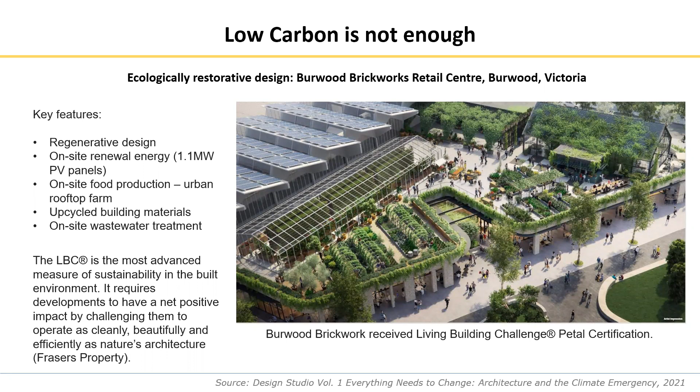We are doing it. The idea is how effectively can we learn from some of these, how we can set a better benchmark, pathways and targets so that we can drive more effectively towards all buildings trying to do the same thing. I mentioned carbon is the focus of my talk. So the case for carbon, net zero carbon, is very clear.

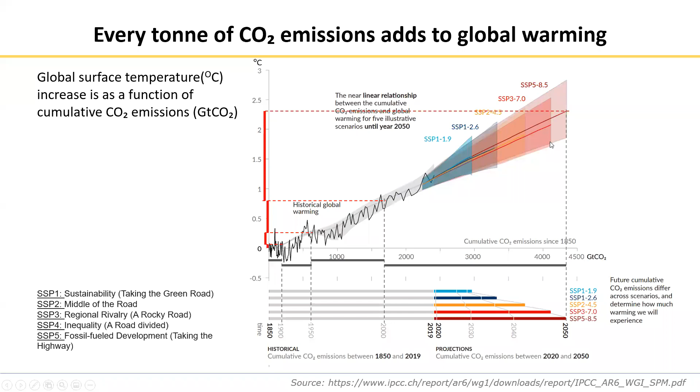And not only are the averages clearly moving in that direction, but there's a difference between the worst case and best case scenarios according to these projections. In the worst case scenario, by 2050, a date being flagged a lot, we're going to exceed 2.5 degrees C quite clearly. Under the best case scenario, we would be under 2 degrees C, but that in itself is not the best result because there are more optimistic scenarios we can aim for.

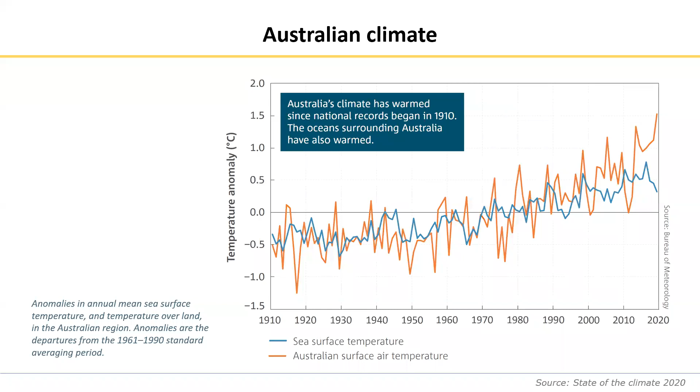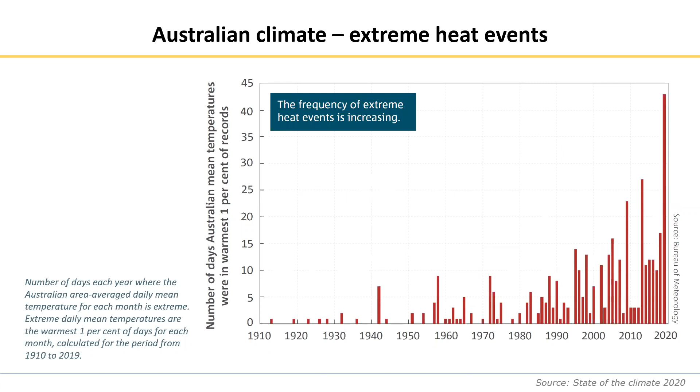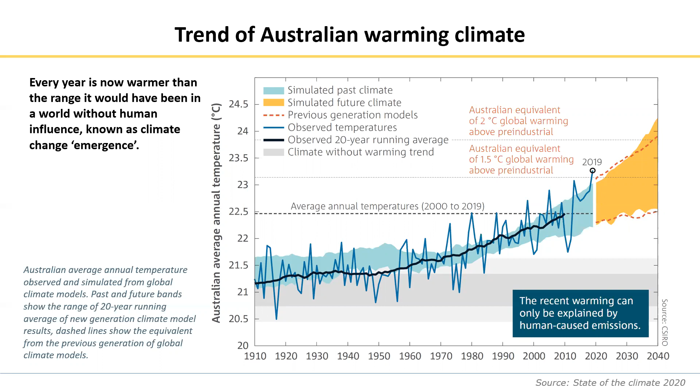We need to be very mindful that this is beyond doubt in terms of science. It's a matter of how, under the best scenario, we can navigate these issues. Buildings and the built environment are a clear opportunity, and hence my talk about buildings today.

At urban scale in Australia, close to 80% of people dwell in cities, urban centers. They are clearly hotspots, and we observe differences, with temperatures now reaching in excess of 40 degrees C in many places, particularly in Sydney here where we live. Western Sydney, Eastern Sydney, differences are talked about a lot.

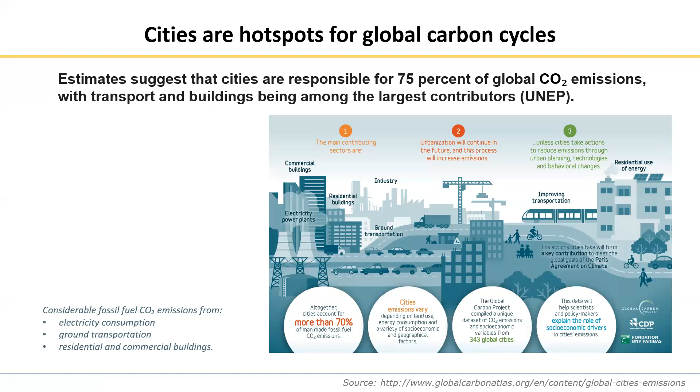Estimates suggest that cities are responsible for about 75% of emissions. And within these numbers sit transport and buildings, which are the larger contributors inside of that. So cities as a whole, but buildings in particular, are our concern as architects and engineers. We are looking at how best we can address some of these numbers that we observe.

The Global Alliance for Buildings and Construction, which is part of UNEP, the United Nations Environment Program, in their latest report show that the building industry consumes about 36% of total energy, and 37% of total emissions are attributable to them. About 10% of the total is the construction side, the manufacturing, the embodied carbon, in other words, and the rest is about operational carbon at the moment.

These numbers are global averages, and per country these numbers are slightly different each time, so for country details you can refer to your own numbers. But the point being that it's in that scale, 37%, some countries go up to 40% or so of total emissions being related to buildings. And it is, either way, very significant.

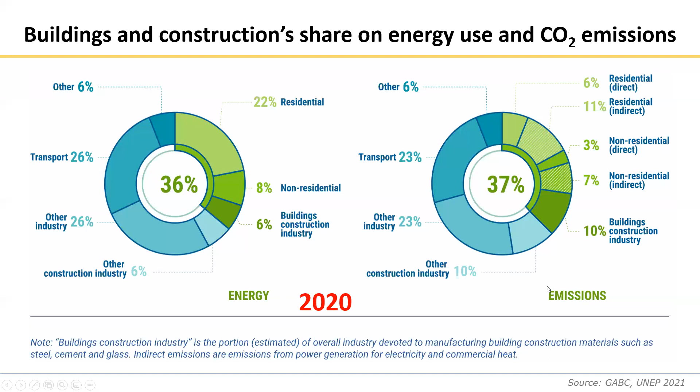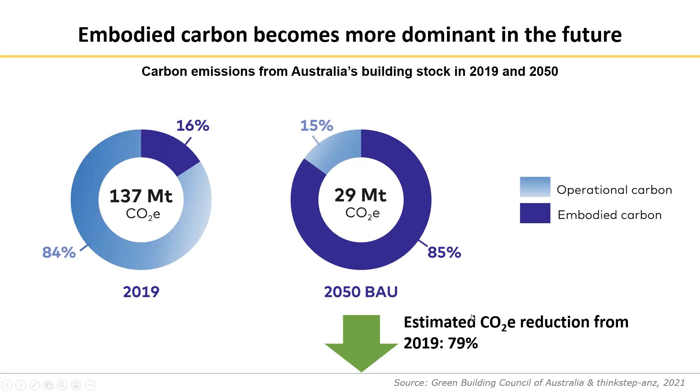So we need to look at what we call whole-of-building issues, and I'll come to that in a minute as well. There are many good stories to point towards.

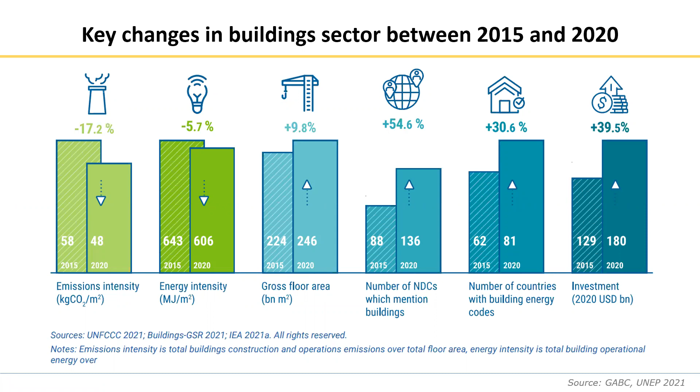Globally, emission intensity has changed, going down from 2015 to 2020. Energy intensity has improved, but at the same time gross floor area is increasing, and the population is increasing too. But on the positive side, the number of countries with building energy codes is increasing, and investment in this whole area of carbon and renewable energy is increasing a lot. So you can see there is increasing commitment and improvement, in which case we are headed in the right direction, but we need to be doing a lot more.

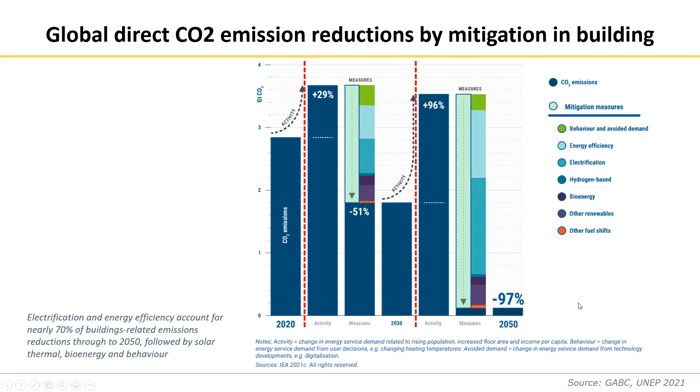And from that 2030, if you look at the increases in terms of business as usual around then, it would be significantly higher. But the measures that will evolve for the 2050 range, in terms of both what's happening at the grid level and at the building site level, we believe this is a good indication of a 97% improvement by 2050, which is very close to the numbers being talked about in terms of emissions reductions.

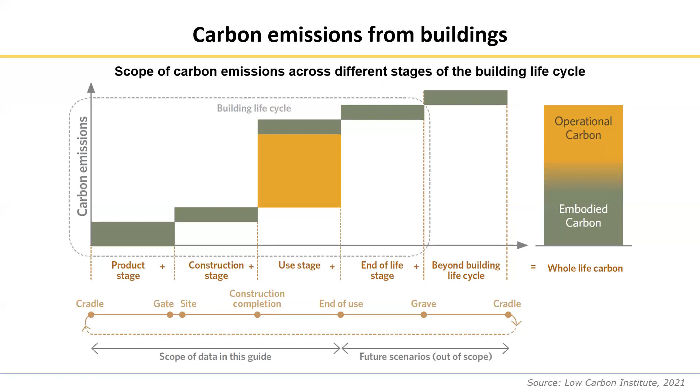So we should be looking at a whole of building and whole of life way of thinking about these. Whole of building includes embodied carbon and operational carbon, both, but across the stages from product stage, construction stage, use, end of life, and beyond life. When we start considering this entire timeline of building life, we can start making significant impacts in terms of reductions in carbon and to deliver on the 2030, 2040, and 2050 goals that we are beginning to have.

Focus now, as I mentioned through those numbers, is getting back on embodied carbon because it was the less understood, perhaps, but less considered element of low carbon design.

It was urgent for them because around that time, their population stopped growing in a net growth sense, and as a result they were having buildings that were unoccupied. We were looking at building redeployment as a serious strategy when the population is not increasing, and they have gone a long way in countries like Japan where they have considered these.

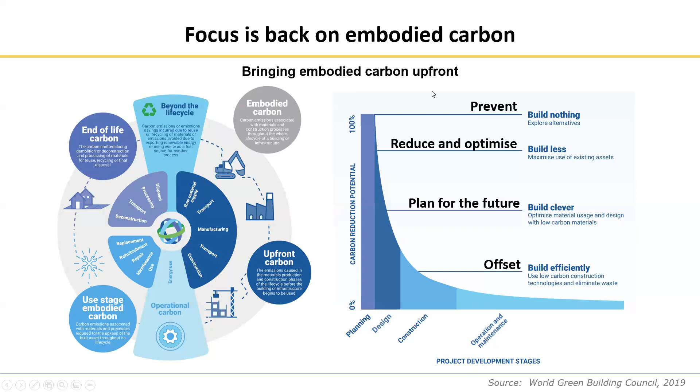Embodied carbon upfront is an issue, but embodied carbon during the life of the building also needs to be taken account of, so that whole of life embodied carbon, not just the front end which is the big number, is still accounted for in the carbon accounting equations.

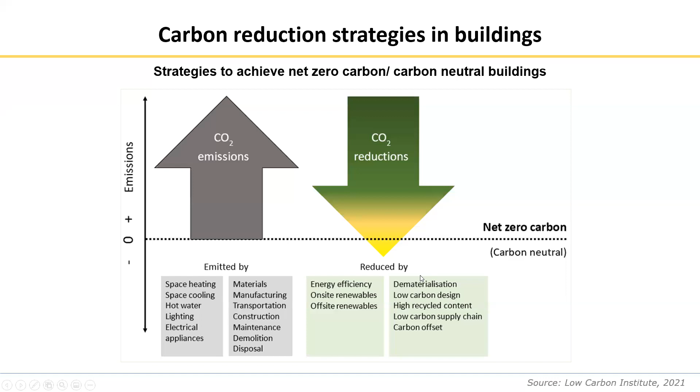And then reduction opportunity to go even beyond the zero mark through efficiency and good design, on-site generation, off-site generation, and also factors like dematerialization, low carbon design, high recycled content, low carbon supply chain, and carbon offsets, etc. So you can see, by better understanding the emitted side of the equation, we can look at how to maximize the opportunity for the reduction side of the equation.

These can be looked at from both the top down and the bottom up levers point of view. Top down, when you start looking at how the grid itself is greening. Over the last 10 years, the grid in Australia has added more than 20% more green electricity, and by 2030 the predictions are it will exceed 50%.

And as a result of that greening of the grid, you can attribute this using, and we have used in our guidelines, the adapted Paris Proof method to attribute it to the building sector, and we find that in itself has a building sector target which can be reduced significantly over time.

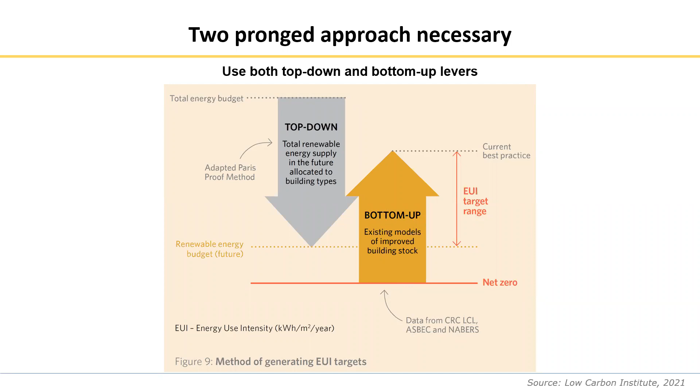But on the bottom up, which is what we can do ourselves on-site in terms of driving or improving the building or building stock as a whole, data from the old CRC, ASBEC, NABERS and others show significant opportunity for improving the energy use intensity, but at the same time achieving best performance that goes beyond the current best performance into how much better we can be.

When we look at carbon accounting itself in terms of national greenhouse accounting methods, the other thing to be aware of is this whole time of day issue. When you look at building consumption, which is the blue line that you can see, that's the consumption side.

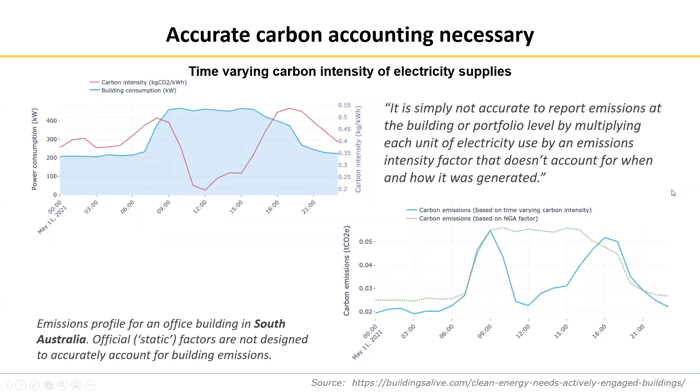When you look at the carbon intensity we get from a grid level and from building on-site generation, you see that during the daytime, after 9 o'clock up to about 6 o'clock in summer, the carbon intensity is much lower because of the relative green electrons in the mix. So it's simply not accurate to report emissions at the building or portfolio level by multiplying each unit of electricity used by an emissions intensity factor that doesn't account for when and how it was generated. At that level of granularity, if you're deploying efficiency measures, generation measures, and offsets, you might be doing better than you'd think looking at the carbon intensity of electricity in the mix. It's something just to think about.

When you look at targets and pathways for commercial buildings, we know current average performance numbers are available, which you can easily find in the guideline we've done. We've been working in this area for the last 30 years and seen the evolution of these discussions. The most recent is a book and guideline for Australia looking at race to net zero and target performance, which can be even better than best performance numbers and current average performance numbers floating around. So it's much better to try to achieve target performance numbers, which is even better than best performance numbers on the consumption side.

Then you start looking at what you can actually do through good design or refurbishment in efficiency - HVAC, lighting, equipment, shading and facades and fabric, etc. You can bring it down significantly. And then energy generation on site - you may find photovoltaics and on-site generation is gradually becoming one of the cheapest options to generate electricity. Together, depending on time of day usage, the role of energy storage within that at building scale - we know it plays a major role at grid scale, but at building scale too.

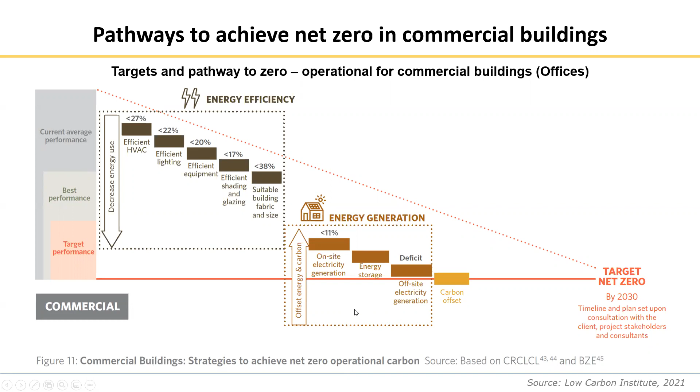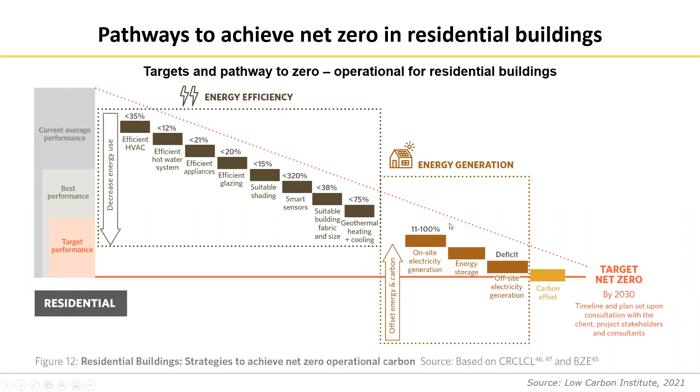In the residential area, again, the same factor applies in terms of current average, best performance, and targeted best performance. You can bring it down so the gradient of that line is much lower, and still make improvements in heating, cooling, water, appliances, glazings, and shading - good design measures we now all know. Together, coupled with on-site and off-site generation, we can go to net zero today, and I'd say in most cases cost effectively, given the price of electricity at the moment and the uncertainties of demand-supply matching happening right now.

And you can be sure that you're all electric and not dependent on gas pricing fluctuations, for example, and you can achieve all this today. It requires commitment both on the client side and the designer side. So for embodied carbon, we've looked at numbers between 2021 to 2030 - a lot can be done. There are existing buildings and new buildings; a lot more can be done with new buildings than existing ones. But in either case, using efficiency improvements, on-site generation and offsets, you can drive progress. You need all the levers at play, and things like building codes need to kick in and set not-to-exceed targets.

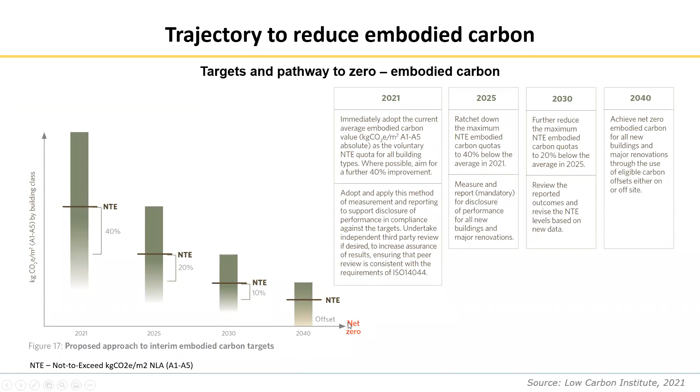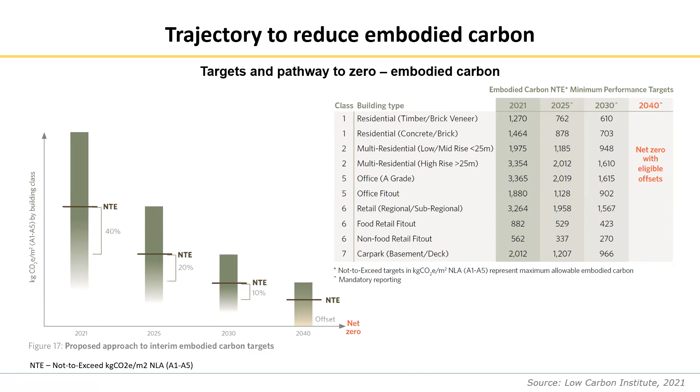And then having methods of measurement so that they are consistent in terms of how we drive towards net zero, so that by 2030, we believe, according to our guide, all new buildings and major retrofits can achieve cost-effective net zero operational, and to a large extent, a large part of the embodied as well by then. But the embodied, in many cases because of existing building stocks, may overrun to 2035, and in the worst case scenario to 2040. So the race is on. We want to be able to do it well before 2050 and deliver on net zero buildings.

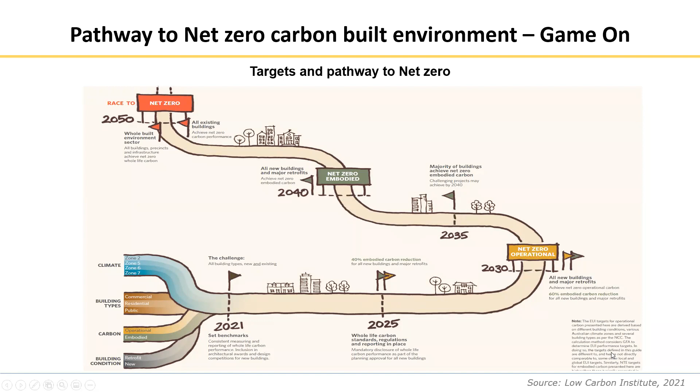Using our guideline and pathway setting, you could do these guidelines for any country. I know there are people from many different countries online today, and all you need is your localized data, localized benchmarks, localized goals in terms of targets, and put it in the context of local standards, levers and policies, and develop a pathway to net zero within the time we think is best from a global carbon perspective, which is 2030 as much as possible, and before 2040 for sure. These are opportunities, and we're happy to talk and guide other countries in trying to achieve that.

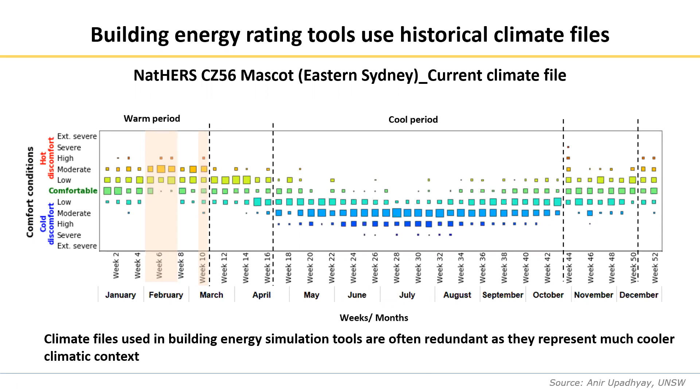There are two major shifts occurring. One of them is the expanding of the warmer period, so much longer warmer periods, and the extreme events, for how many days at a time we will expect very high peak conditions. So when you look at 40 degrees C, how many days were exceeded in Western Sydney some years ago, the data files from 2010 or so would have that. But now the number of days in the summer period when these extremes occur, recurring days beyond 40 degrees C, is much higher. And the trend will continue to a point where the warm period, which means cooling required, is going to become much longer.

So it is very important, because when we build today, according to these projections, the climate will clearly change within the period that we are building these buildings for. So we need to be looking at this as a factor quite significantly as soon as possible.

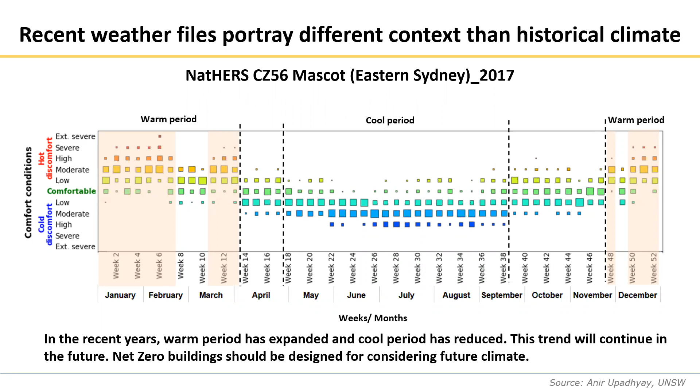The other thing I wanted to add, when you look at behavior change, comfort, well-being, the need for data, the need for knowledge so that you can act appropriately, is very important. You need guidance at the house level and as a collection of houses within districts, and governments need to know for their policy purpose much more on a daily basis, peak day basis, but also on an annual basis.

So over a 24-hour cycle, for example, how things happen in a building and a collection of buildings and different building types - what we did in the CRC was develop a tool that allows you to monitor and display real-time energy and emissions to the households for behavior change purposes. It won a Committee for Sydney award in 2019. This tool has gone past the prototype development and is now increasingly going to be made available after a few more developments that are taking place at the moment.

It allows you to look at not only temperature, which is linked with comfort and well-being in different parts of the house, but also the energy and cost factors - what is it costing you to heat, cool, or run the building over a certain period, be it a day or a month, or also looking at emissions in that sense. It can look at the role of solar energy generation on site, how much contribution that is making in terms of offsetting, and then how much more is required before you go to net zero, and how much more before you start paying the embodied carbon debt, for example.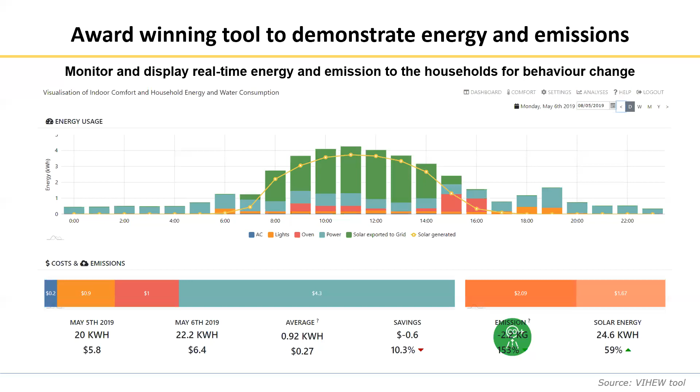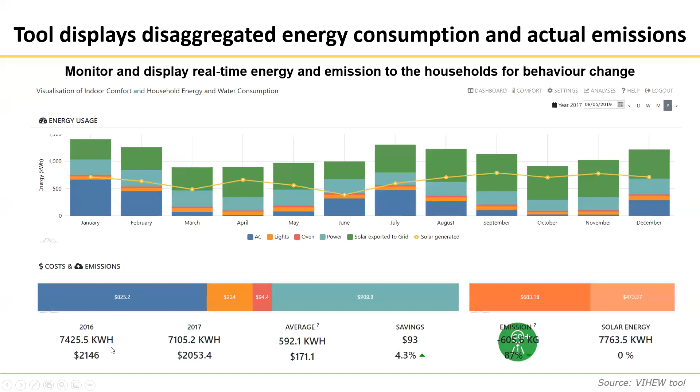So it's a tool that we think will be very, very important in the future. It talks not only about energy numbers and carbon numbers, but also can give you over a year your performance profile for different years, and in breakdown terms, looking at air conditioning, lights, oven, power, solar exported, solar generated - all these factors, depending on your tariff arrangements, shown in detail. It also looks at your BASIX score, for example, and your actual performance in relation to that.

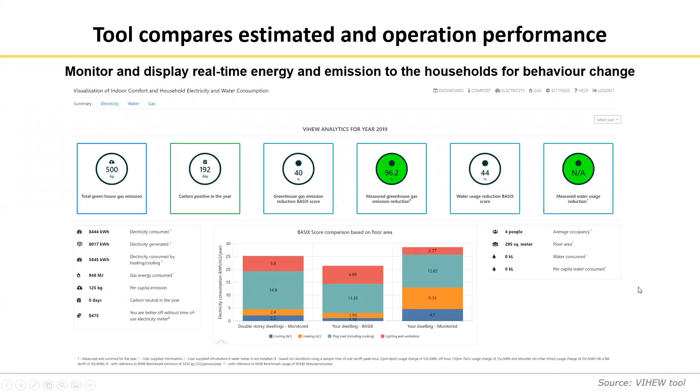It can show you how your house compares to what was projected, but also how it compares to the stock of houses who may be connected, with data available over a period of time, so it does average comparisons with other houses of the same time, same type, for example. It's going to be quite a powerful tool, we believe, and once developed, it can be useful not only at a household occupant level, but also at the government and policy level.

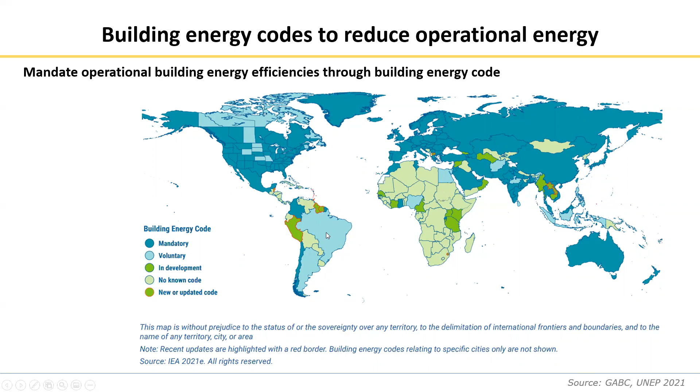There are a few other things happening globally, as I mentioned earlier. The emergence of building codes globally - you can see mandatory codes in so many countries already, if you look at the index here. But it is not always clear what is mandatory, whether it's net zero, or a trajectory to net zero that's mandatory, or just some elements of energy use. There is significant coloring here where at least some level of mandatory building codes are in place. There are others where it's voluntary and in development, and we know where the focus should be, especially for UN and other agencies who can actually know where to focus to make the improvements required.

A lot is happening globally in many circles. The Global Alliance for Buildings and Construction - you just have to go on their website to find their reports - has a short-term, medium-term, and long-term view of how the navigation towards net zero would occur. Global Alliance for 2030, which is short-term, says net zero operational ready for all new buildings, which is very similar to what we have said in our Australian guideline. Net zero embodied carbon by 2040 for new buildings in some countries under Global Alliance, and by 2050 clearly trying to reach all buildings.

World Green Building Council, one of the major organizations globally, calls for 40% reduction in embodied carbon for new building structures, net zero operational carbon for all new buildings, and pushing towards net zero operational carbon for all buildings, including existing buildings, by 2050. RIBA, the Royal Institute of British Architects, has its own numbers: 40% reduction in embodied, 58% operational energy reduction in new build offices, and 71% reduction in domestic buildings.

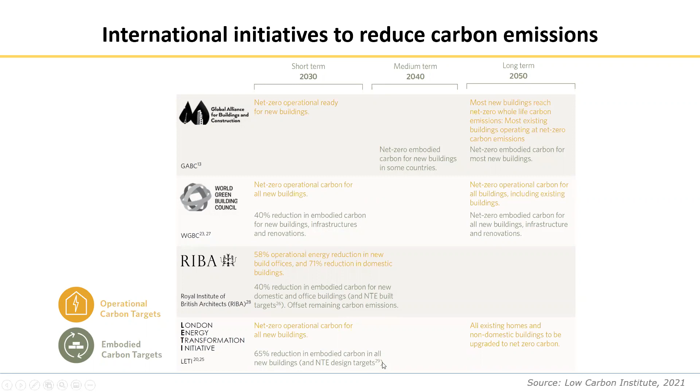Through these, they hope to drive much more rapid change. There are others like LETI, the London Energy Transformation Initiative, which asks for 65% reduction in embodied carbon. You can see that embodied carbon is now emerging more seriously in all of these, including Australian ones, which shows the importance that I raised earlier.

The American Institute of Architects calls for 100% carbon neutral, using no fossil fuel greenhouse gas emitting energy to operate, for all new buildings - 45% reduction by 2025 and 65% by 2030. So they have some serious targets in place. Architecture 2030, if you want to look them up, has documentation you can follow up on in terms of the details of some of these numbers.

International Energy Agency: all new buildings are zero carbon ready by 2030, 20% of existing buildings retrofitted to be zero carbon ready, and 40% reduction per square meter of new floor area by 2030. Then changing to 50% of existing buildings retrofitted to zero carbon by 2040, and by 2050, more than 85% of buildings are zero carbon ready, with 30% reduction in the use of energy intensive materials per unit floor area. So they have their own numbers, and you can see how everyone is beginning to navigate that way.

The Danish government has its own phased targets from 2023, reaching 90% of new construction performing better climatically than currently by 2029. So it's within the 2030 sort of timeline that we are looking at.

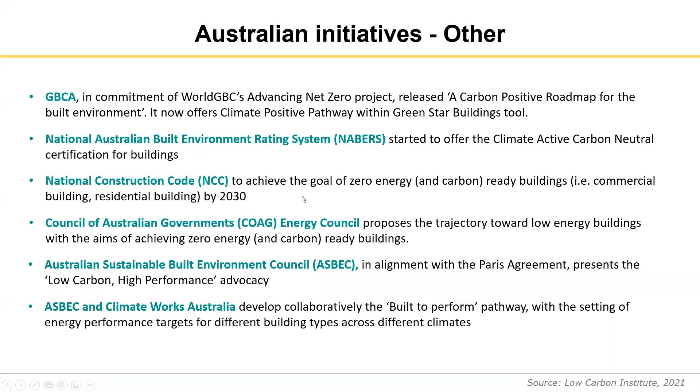Other initiatives at the level of City of Sydney, City of Melbourne, and a number of other cities are already engaging in this arena. Sustainability Victoria and Beyond Zero Emissions have launched a zero emissions buildings plan, and NatHERS and BASIX are trying to introduce material embodied carbon targets for houses at some point. The CSIRO whole-of-house performance rating tools are being looked at, which will drive things further. NABERS has also started working towards introducing material embodied carbon in coming years, working out how best to do that.

If all these initiatives have matured by 2025, according to the guidelines we've developed, it makes it so much easier that by 2030 we can start delivering serious carbon reductions in Australian building stock, and help deliver on the government's 2030 plans for 43% reductions and better from the building sector's contribution. Then it becomes easier in future years.

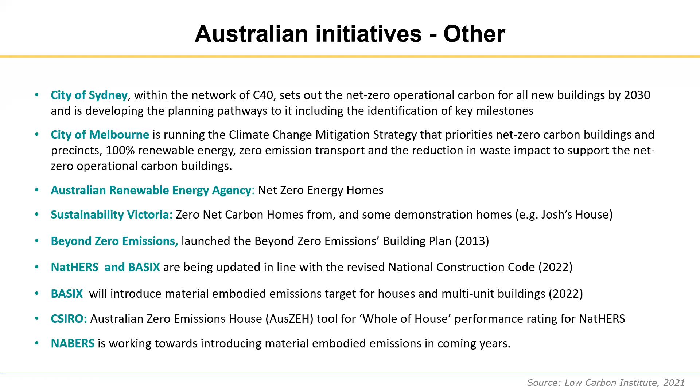So thank you very much. I had promised Len that I would finish in 45 minutes, and I think I am just there now. I will try and address a number of questions coming through.

So Len, do you want me to continue with some of these questions? Sure, Deo, thank you so much for your wonderful talk. We have received some questions during the registration process, and also a few comments coming through the chat. So over to you.

Okay, thank you. Where there are more questions, I will try and get back on the Zoom system by answering those. Given the time we have, we probably can answer some of those. Let me start.

Becky Sharp is asking, do you think there are any adaptation or mitigation measures that are particularly suited to buildings occupied by low income or vulnerable cohorts, that is, social housing? I think that is a very important question. Clearly, in people's minds, there's this idea that when you try to build these super efficient net zero houses, the construction costs go up. In actual fact, I think you can build very efficient net zero type houses without increasing the cost, by being clever about how you build them.